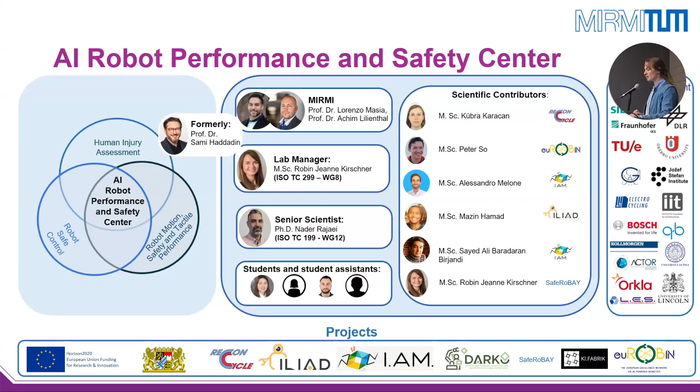We have a lot of partners and projects involved in this laboratory, which all kind of focus on one thing. They are all usually industrial applications where we have flexible physical interactions that are required. We have humans in the loop, undefined path planning, objects with various geometries. Our big point is, how can we actually safely integrate intelligent robotics into these factories for such applications?

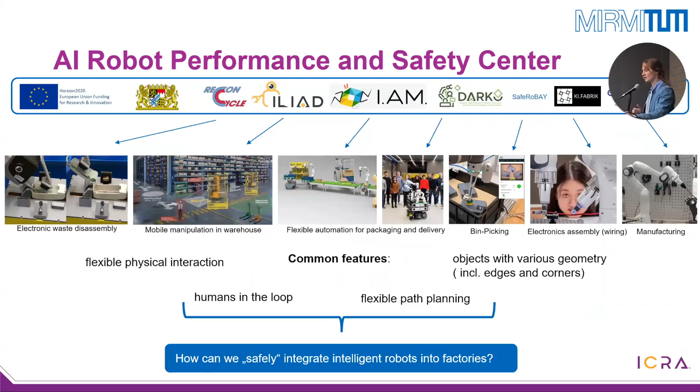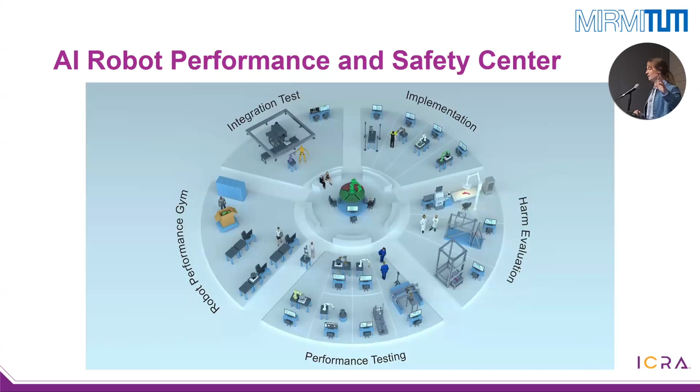For that, we have built an infrastructure at the MIRMI, and this whole infrastructure evolves around having harm evaluation, performance testing, implementation areas, integration testing areas. And that whole place is supposed to be used for then also creating certified safe applications in the end.

Now, certified safe applications - if I'm talking about certification of robotic applications, there are some very fundamental steps that we always need to follow and always need to keep in mind. First is that we always have to have a look at our intended applications, and we have to run through a whole loop in order to, in the end, have something that we can call certifiably safe.

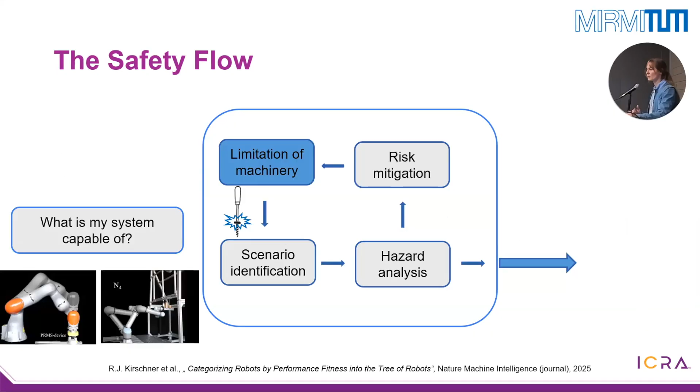The first step is that we have to look at what is the limitation of my machinery. What is my robot actually capable of? What can it do? The second step is that we have to identify scenarios. What is the situation that we need to consider? Is there a robot moving around in the human area? Is the human moving towards the robot? Is it moving away from the robot? Is there constraints? What is the context?

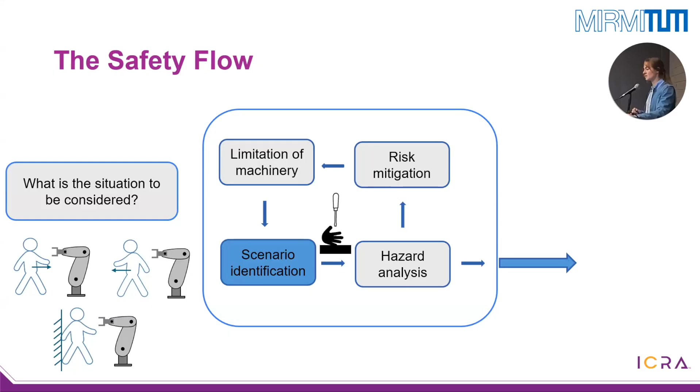Then, if we know the scenario, we can identify what is the hazard that is actually related to the scenario. So what we look at here is the severity of harm. What kind of injury can occur in case the robot hits the human? How likely is that? How well is that avoidable?

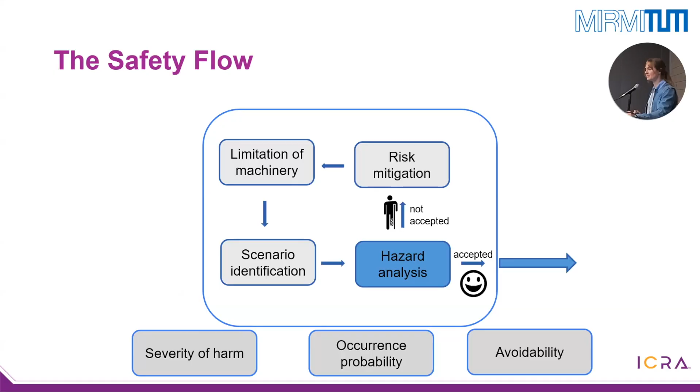And then there's obviously two options. We can say, okay, it's safe, no injury happening, all good. Or if it's not accepted, we have to go into the cycle of risk mitigation strategies. There, what we are looking at mostly is safe impedance control, or collision reactions, or velocity scaling, or the such.

If there is somebody who knows a lot about standardization, you might be familiar with also the terms of power and force limiting, and speed and separation monitoring. That is - it doesn't look like it. Then that's great, because I will not refer to these terms at all, even though they're part of standardization.

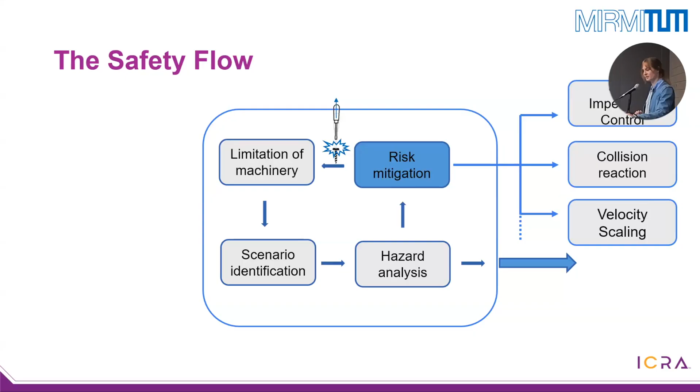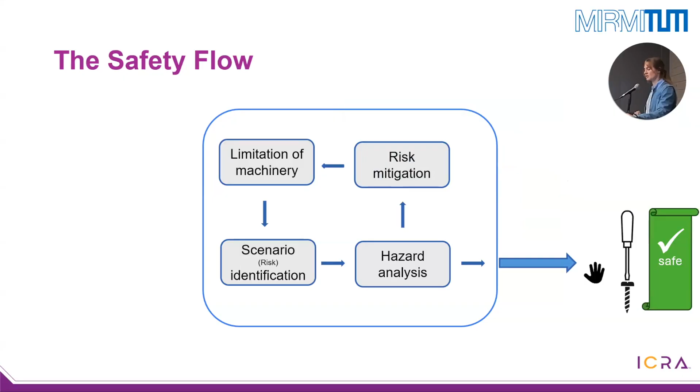So if we have run through this loop, if we've documented everything well and have really taken care of considering the state of the art to make this application safe, we can get a certification on this safety. What does this certificate mean? This certificate means nothing but that I have, based on the state of the art that is currently available, done everything to reduce systematic errors that can cause harm to the human.

There is always a remaining risk for random errors occurring that is accepted, based on some severity of harm versus the exposure to the potential hazard occurring. For robots and robotics applications, this is defined by a standard that refers to this application with the robot always being very severely hazardous, ending up with an allowed failure rate of 10 to the -7. So if we ever want to certify something for robotics applications, currently the failure rate of whatever you have is allowed to be 10 to the -7.

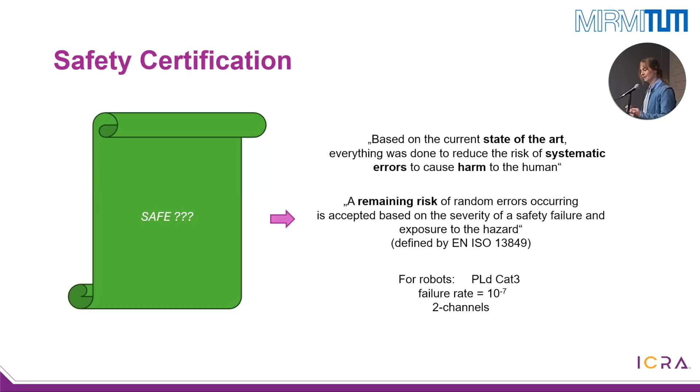And it has to be implemented by 2 channels. So, for all of these sectors, for human-robot interaction, the limitation of the machinery, the risk mitigation, the hazard analysis, there is reasonably good standards and reasonably good options to perform this certification. Where we struggle a lot is the part with scenario identification or risk identification. Here, we only currently have one very valid option, which is ISO 12100. This standard gives a specific procedure on how to perform risk assessment, and it's static. After you've performed the risk assessment, this is what it is.

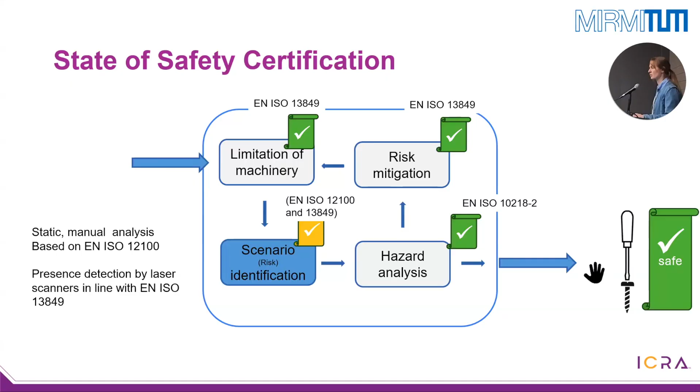For example, I would consider a human-robot interaction where the robot has a screwdriver and the human can come close with his hand, and I have to define areas where the hand can be constrained. Then I have to move according to this constraint. I can define an area where the human is unconstrained, and move according to this constraint, but I cannot currently flexibly change these options. The only thing we can currently do based on the standardization is presence detection using laser scanners. So if there is a human, I have to stop or go to a slow velocity. That is a bummer, a bit limiting.

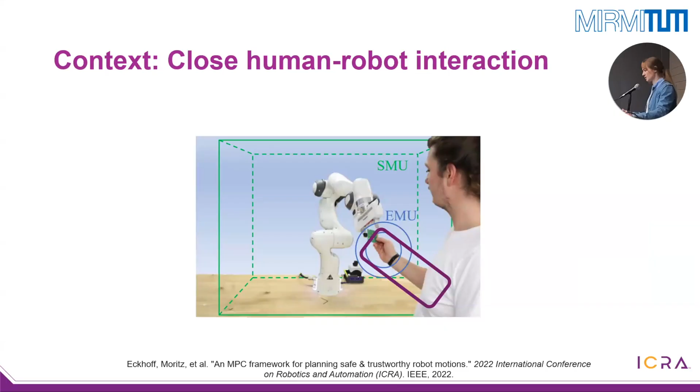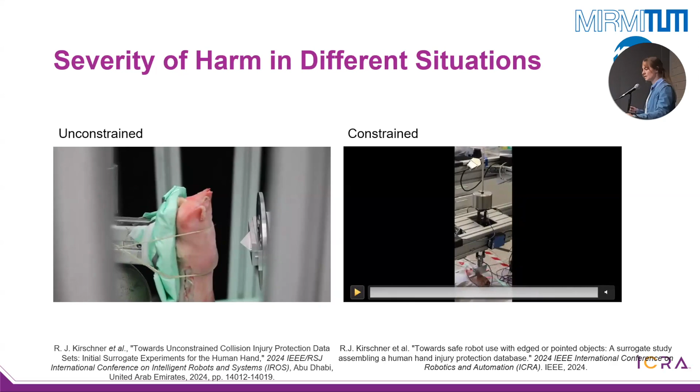Because what we have seen in our research, and what we have discovered in the last years of performing injury testing, referring to applications where human and robot are close to each other, we are trying to estimate the positions of the whole arm or different body parts. For this interaction between a robot and a human arm, what we have observed is injuries happening in unconstrained collision situations. We've built test stands and run thousands of tests by now, looking at what happens if we have collisions in constrained scenarios where the human cannot move away. What are the differences? Through these tests, we have been able to generate thresholds for energy levels that are allowed in different situations, and that could be allowable.

Now if we look at this static way of currently doing a risk assessment, which is easily certifiable, we always need to consider the worst case. The worst case we found to be human fingers, being constrained and stationary. That is at least an assumption that the ISO standardization allows you, that you can assume the human does not move. That's good.

If we would now be able to really predict the motion of the human, if we know where the human actually is, that would give us a great advantage. For example, if we are looking at body parts, if I would know there is the hand close, or there is actually a single finger, that makes a huge difference. According to the evaluations we've done so far, it would allow us to be 30% faster in this case. So from 0.14 meters per second, we could increase the speed up to 0.21 meters per second. And this is worst case, having a sharp geometry in the hand of the robot.

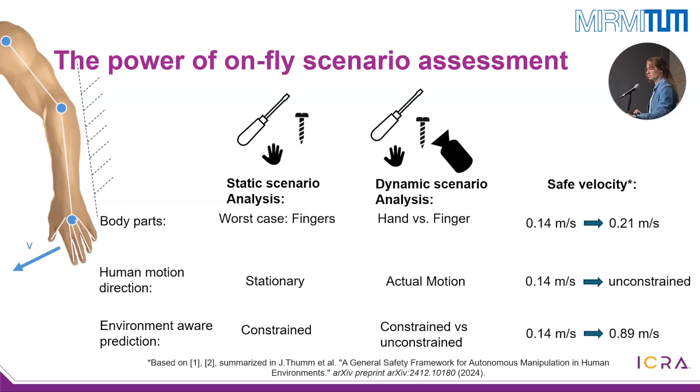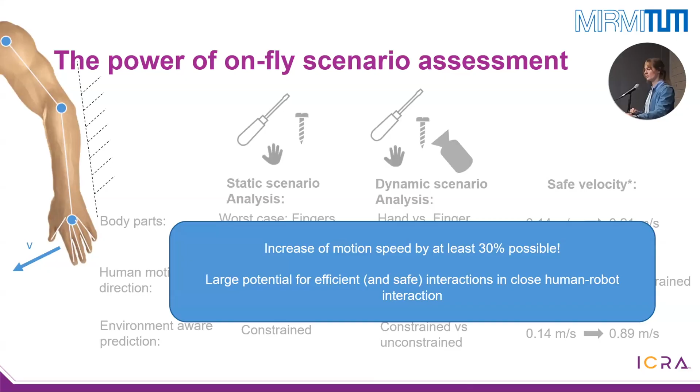Now the challenge is, how do we get this certifiable as safe? The big point we always consider in standardization is the constraint on how high the failure rate can be. This breaks down to two components: we look at the software and we look at the hardware. The software is considered to have no random errors currently accepted. This is also one reason you're not allowed to just use any software for programming such applications; you are pretty much restrained to C programming. The software runs on its own hardware, decoupled from the rest of the structure. Systematic errors in the logic are to be prevented by in-depth documentation, and there is a strict way of how to set up this software structure.

The hardware instead is allowed to have this random error. Anyhow, for these robotic applications, we currently have to have it two-channeled, so that if one channel fails, the second channel can still catch the safety functionality.

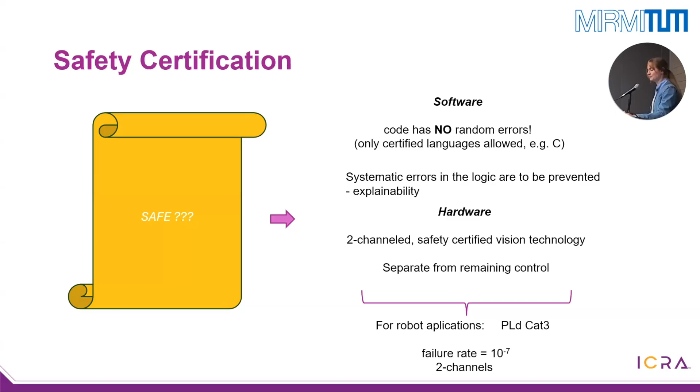And now I am here talking to a big group of people that really know a lot about human motion prediction, probably the best in the world. And none of you will be able to tell me that their prediction has a failure rate of 10 to the -7 or less. You would surprise me if you do.

Yeah, that is indeed a problem. So with the current state of the art of certification, we struggle. That is why the ISO is currently having big discussions and technical committees raising more and more to kind of define the restrictions on AI-based software in general. If you want to become part of this and share your knowledge, I guess this is the best time to join currently.

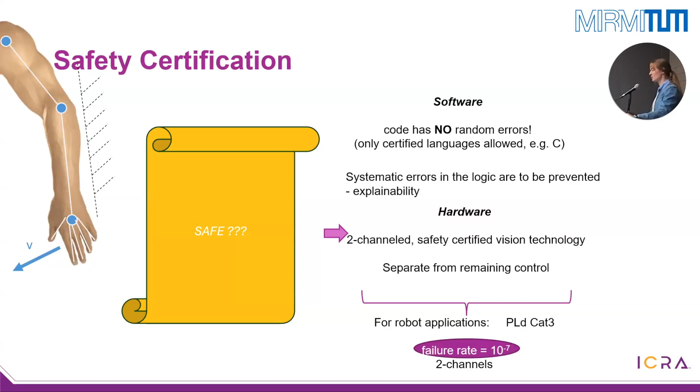A strategy - I'm saying it's a strategy because it is obviously not defined yet and it's not safety certified by now. But the strategy is to try to look at the risk again, so we try to reclassify this performance level, this 10 to the -7. Is this really necessary as a failure rate? What do we have to do for that?

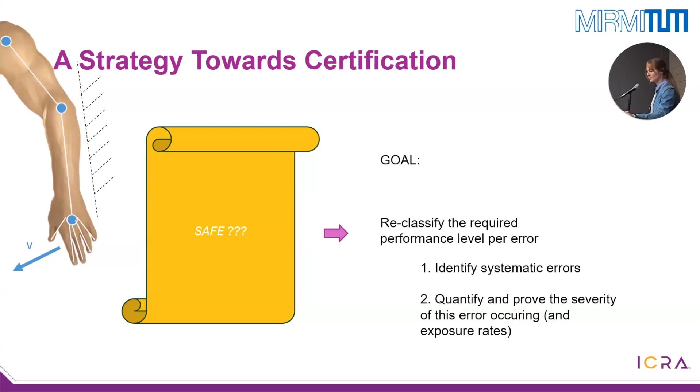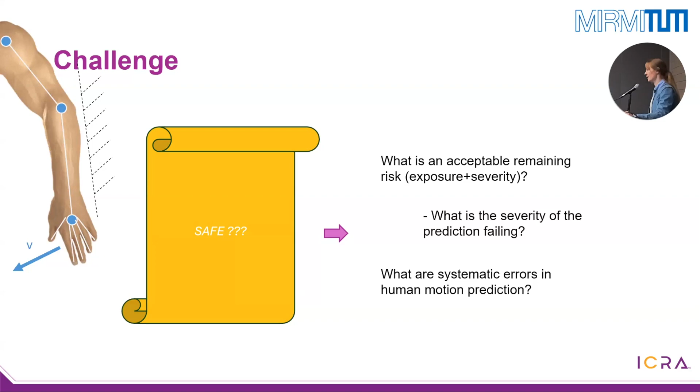For that, we have to understand what are the systematic errors that can occur in our prediction and in our detection. Secondly, we have to understand from this error, what is the consequence, what is the severity that can actually occur if this error is present. So the first question is, what is an acceptable remaining risk? For that we need to know the severity of prediction failing, and the systematic errors that exist in human motion prediction that we need to consider.

Following, I've tried, from my experience-based view, to classify a couple of errors that I've seen, and to give an overview of what could be the potential severities of harm arising from them.

So one of them is obviously very simple: human is not detected. That can be a systematic problem because you have an error in the model, because the camera is somehow obscured, or you have unexpected behavior that is not covered by the model, for example. The severity of human presence not being detected at all is quite high. I don't think we could ever argue to go around performance level D, category 3, on this error, because that can lead to a collision.

If we're considering a humanoid robot today, we've probably all seen these videos of humanoids currently going a bit rogue, where they will definitely injure a person. So high severity of harm for this error, and we would probably always need to stick to this performance level D.

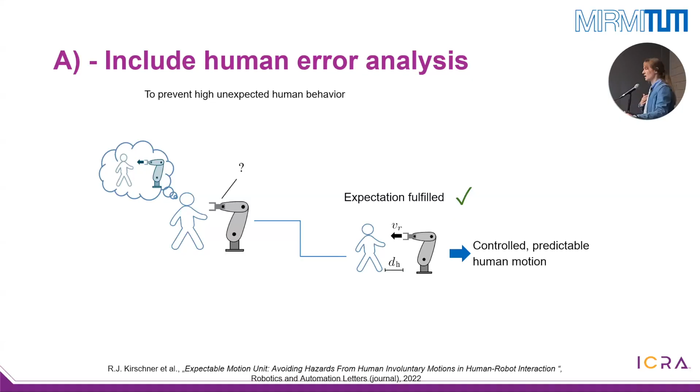Things like the expectation of the human for motion of the robot can be considered, because one thing is that if we have an expectation and we know a robot is moving in a certain way, we also adapt our actions to it. And the other way around, if I have an expectation but the robot is not meeting this expectation, there is a likeliness of startle and surprise reactions, as we call it. These can generate involuntary, unpredictable motions. They are very fast. They are hard to consider in the models.

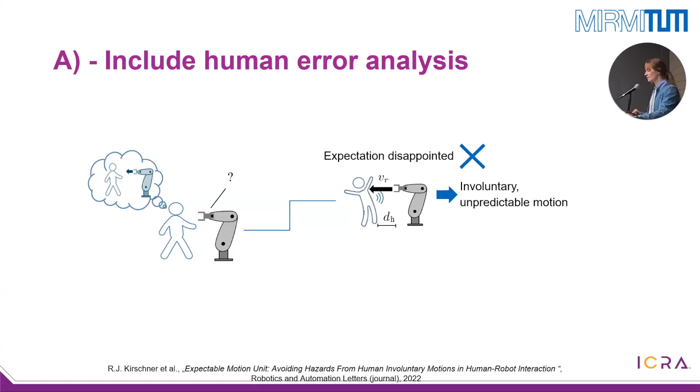And what we have done back in 2022, I think, is we did a study investigating what distances and what velocities are associated to such startle and surprise reactions occurring. So this is one potential way how we could include human errors or human error analysis into the prediction.

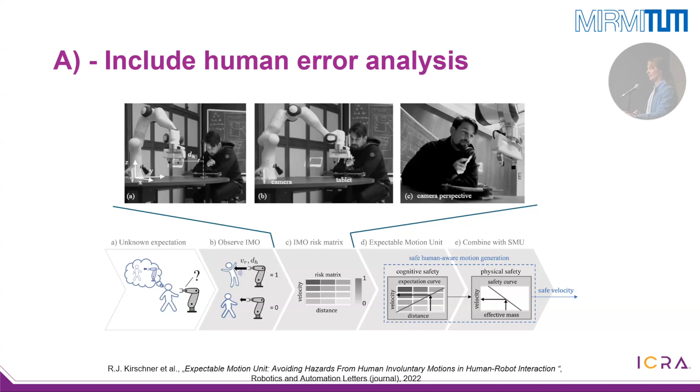To prevent things like the misclassification of human fingers and hands, and errors or severity of harm occurring from that, what we can do is embed safety hierarchies. So we can try to explain that there is always the human finger as being the worst case scenario, constrained human finger.

We could allow a velocity of 0.14 meter per second. And even if we have, for example, a low accuracy of our prediction, if we are not as certain about our prediction of the body part, we could still say, okay, we can use this as the safe velocity, because it is the worst case.

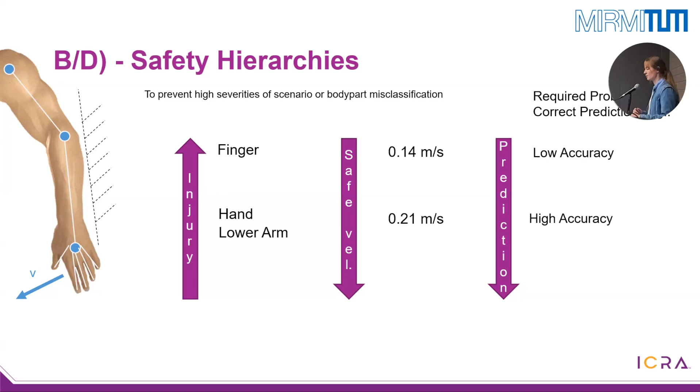On the other hand, if we know for very sure, if we have a high accuracy in our prediction, we could trust our prediction and we could say, okay, we have a hand and a lower arm, and we can increase the robot speed again.

Good. Yeah, so in conclusion, the chances and the value of human motion prediction is very high, especially also in close human-robot interaction. If we are able to really generate certifiable, safe human motion prediction applications, we can gain up to 30% higher velocities, which is quite a bit.

But to go into the direction of certifiable, safe human motion prediction, we have to do a very close analysis of what are the errors occurring. We have to define all systematic errors that can happen. We have to assign severities to them. These severities need to be in line with the biomechanical limits of human body parts.

We can use all of this knowledge, and we have to embed it from the start, while we are already designing the human motion prediction algorithms, applications, whatever. We have to consider this from the start, such that we can, for example, build such hierarchical structures, or we can include into our models unpredicted scenarios, for example.

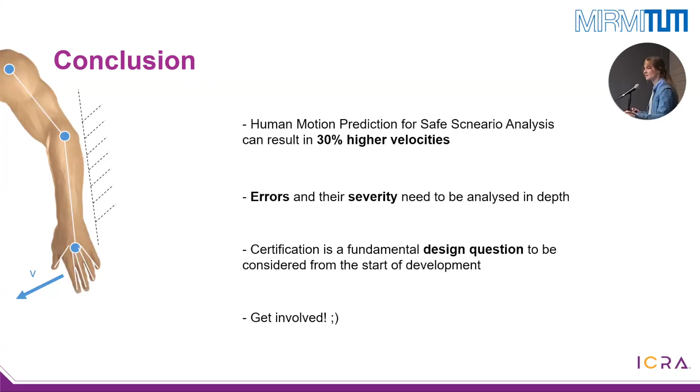And well, the most important thing I would say is that from our researcher point of view, there is always very few people going into these technical committees of standardization, because it's tough. It's tough. But it's very necessary, and the knowledge sitting here is definitely very valuable. And I would advise all of you, if you want to drive this field a bit further, try to go into these technical committees, try to check out your local standardization committees and get involved.